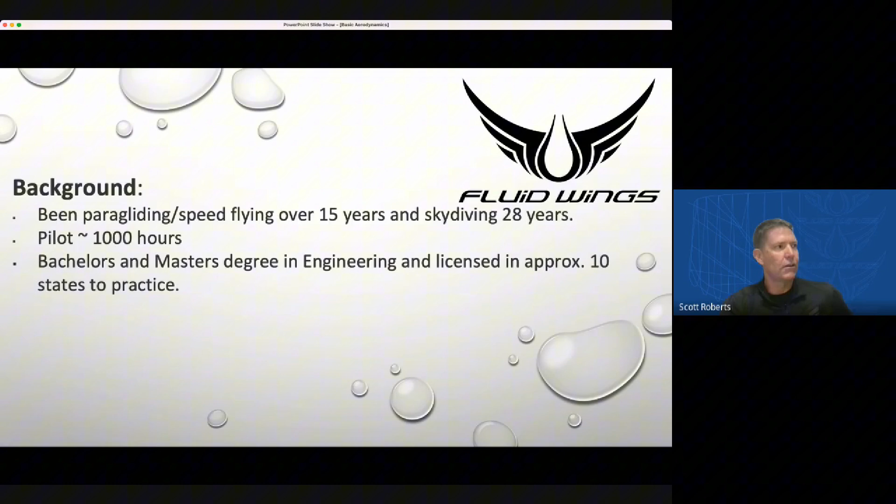A little bit about me. You guys don't, most of you know me, some may not. I've been paragliding and speed flying for about 15 years and skydiving for almost 28 now. Got a few hours flying airplanes, done some engineering. I've got a bachelor's and a master's degree. I'm licensed and I still practice in about 10 different states. I'm also lead designer here at Fluid Wings, so I design a lot of parachutes and some paraglider, speed wing stuff. Designed over 20 different models at this point.

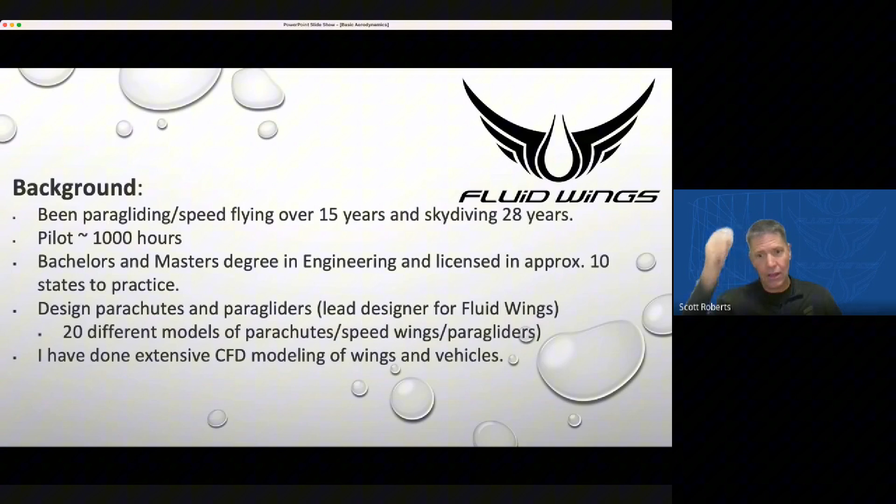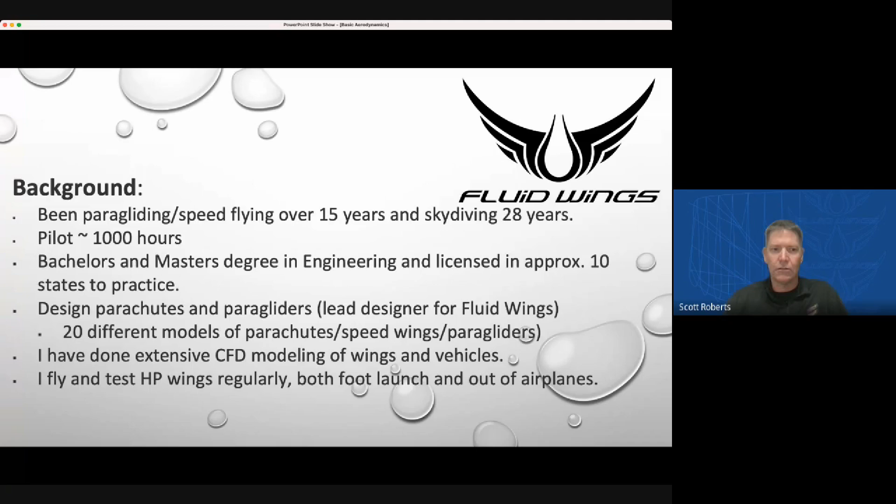Done a ton of CFD. CFD is computational fluid dynamics on wings and vehicles. Lots of stuff. So probably the most important part is that I still actually fly the stuff. Foot launch, jumping, probably more jumping these days than foot launching, but still active in both.

Tonight I kind of want to focus on low speed aerodynamics. Low speeds in an aerodynamics world is defined as nowhere near the speed of sound. So we're going to say really, really low Mach numbers. That pretty much applies for all general aviation, aircraft, gliders, paragliders, and parachutes. And probably will hold true for a really long time. I don't see us breaking Mach anytime soon.

I'll ask you tonight to pay attention and listen and understand that what I'm telling you may not be what you feel sometimes. That's totally normal. It happens in airplanes too. What you feel versus what's actually going on for aerodynamics are very often very different.

The aerodynamics is often very counterintuitive. So what people feel and what's actually happening with the airflow across the wing can be two different things. We're going to focus on what's actually going on with the wing tonight, and we can correlate that to what it feels like a little bit. But it's important to understand what's going on. In an aircraft, they talk about this a lot—flying seat of the pants versus instruments. Seat of the pants is literally when you're flying an airplane and you feel the feedback on the seat. Turns out that actually breaks down sometimes when you have a lack of visual references. The same thing can happen with airflow. So we're going to fly tonight using instruments and more technical jargon.

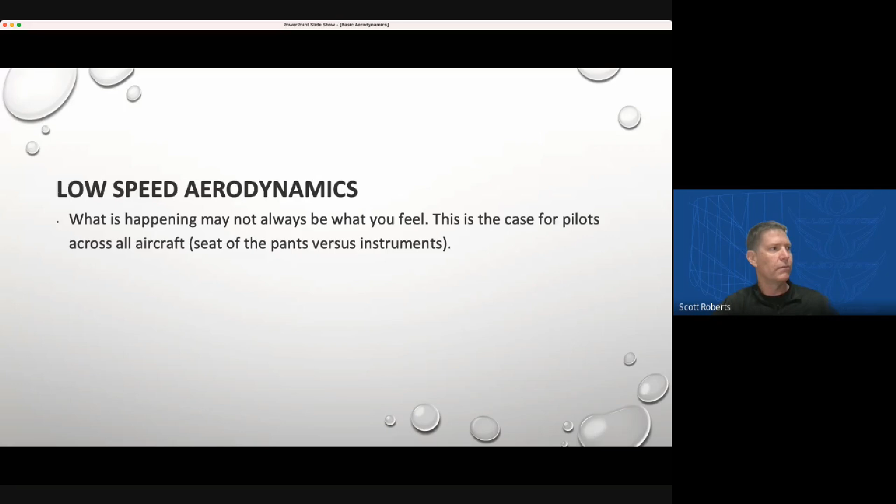For aerodynamics, the science is pretty well settled for low speed stuff. There's not a whole lot of new stuff coming. So be wary when you hear the idea that someone has a new theory in aerodynamics. We've really kind of solved a lot of this stuff. We haven't done a whole lot new in low speed stuff. Now, what we do is find new ways to capitalize on these existing understood mechanics and how it works. The future advances are all going to live there, in new ways of solving the same problems. But understanding how it works and what's really going on is kind of settled science.

Most of what we're going to talk about tonight is going to be steady state, not dynamics. We'll define steady state as—we're not going to be accelerating. So it's zero acceleration for a lot of the stuff we're talking about.

We're going to talk about a lot of vocabulary, how the airflow flows around a wing, and really delve into defining all the parameters for that. We're going to talk a little bit about how the airflow affects the wings flying through different columns of air, a little bit about glide ratios, angles of attack, stability, and then we'll wrap up with some basic turn mechanics. That'll be it, and it should take us about an hour plus tonight, plus some questions.

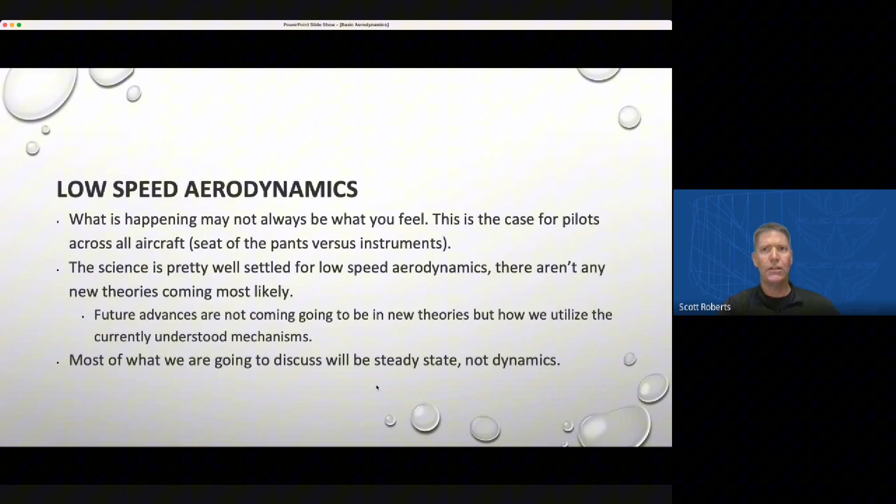So I'm going to jump right into it, and we're going to get going on some basic terminology. Everyone, you may know this stuff, you may not, but this is how we're going to refer to things for the rest of tonight. And if you use these terms as you're talking about flying in the future, you'll find that your conversations become a lot more clear.

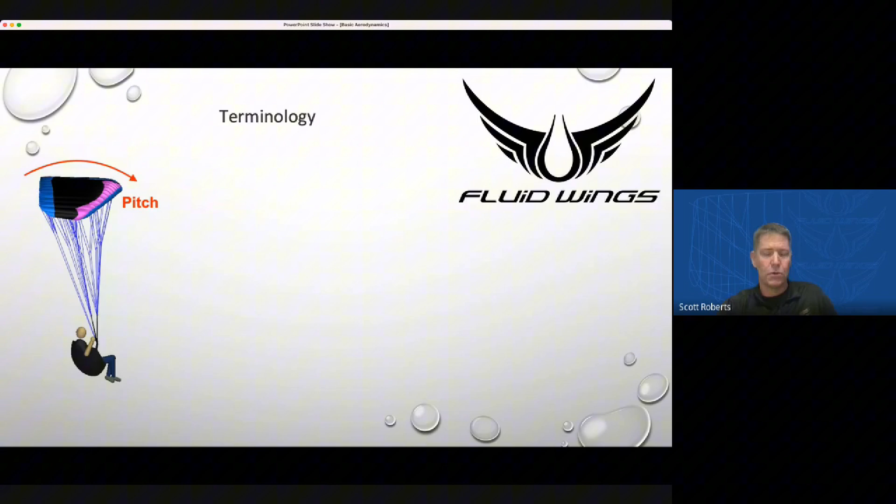So pitch is the movement around the axis. This controls whether we're going nose down or nose up. Roll is side to side. And yaw is swiveled side to side, changes the direction you're looking. On a parachute, these are all coupled together, so you can't really get one without the other.

They don't have a rudder. So if we had a rudder, we could get yaw individually, or we could get roll individually, or with an elevator, you could get pitch individually. But because we're a deformable wing with a pendulum weight under it, they're all coupled together. There's a few ways we can get these, but these are the basic axes of movement we're going to talk about.

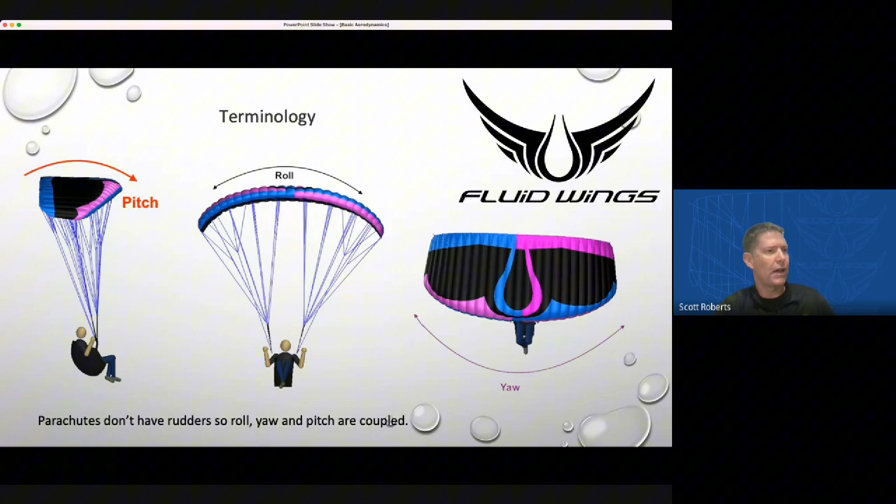Another thing we're going to talk about a lot, and you'll hear me mention in this and future seminars, is trim speed. When you set your wing up, it's set to fly at a certain angle of attack and a certain glide ratio when you go hands up and don't give any inputs. So it's kind of the natural flying attitude of the wing with your wing loading, your geometry, and your body. That's the trim speed.

So if you're on a speed wing or a paraglider, you could be putting speed bar in or using brakes. Speed bar would speed it up and decrease the angle of attack, or you could use brakes to change your glide ratio as well. But in this conversation tonight, trim speed is going to be just that steady state, no input flying.

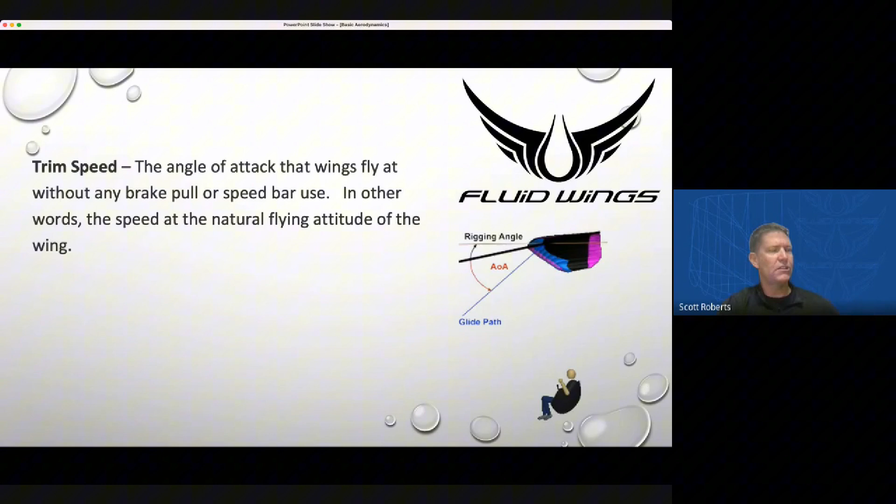Most higher aspect ratio wings, like paragliders, achieve their best lift to drag pretty close to their trim speed. So the flatter the wing, the higher the aspect ratio, generally they're going to be getting their best lift to drag, their best glide ratio, right at where they're trimmed, or pretty close.

For parachutes and speed wings, the two deviate quite a bit. Our trim speed is going to be nowhere near the best glide or best lift to drag on a parachute or speed wing. So that can be a useful topic and a useful way to understand your wings, when you're talking about whether a wing is fast, slow, or how it's trimmed. Talking about the trim speed can tell you a lot about a wing.

So I'd like to introduce that terminology. It's pretty widespread in the paragliding world. I don't hear it as much in skydiving, but I'm starting to hear it more.

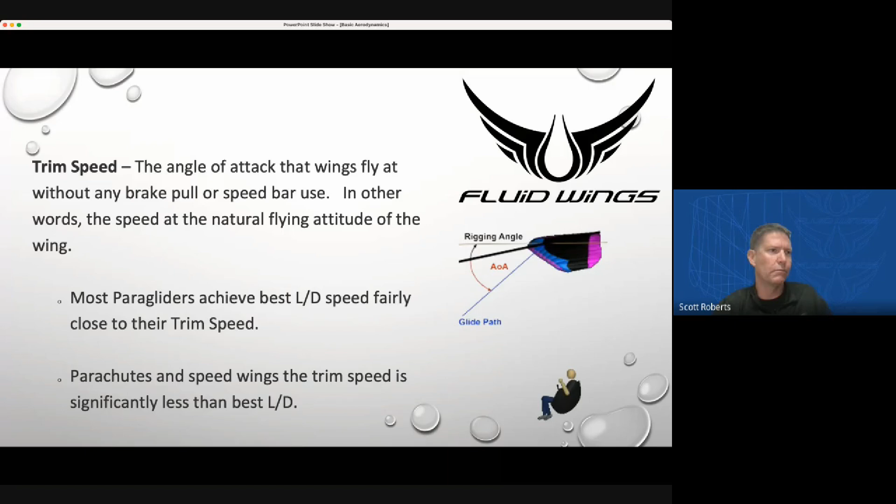Descent rate, pretty simple, this is just the vertical speed. So you're going down at a certain rate and going forward at a certain rate. In the US, we usually use feet per minute. In most other countries, they would use meters per second.

So descent rate, let me go back, is just a common thing. A lot of people get total speed and descent rate mixed up. They can perceive descent rate a lot better than they can total airspeed or trim speed, and they'll mix the two up. So I wanted to take a moment here to delineate these for people, so that they understand what you get on your FlySight is probably just descent rate. You're probably not getting a good trim speed because you don't have a venturi or a pitot tube.

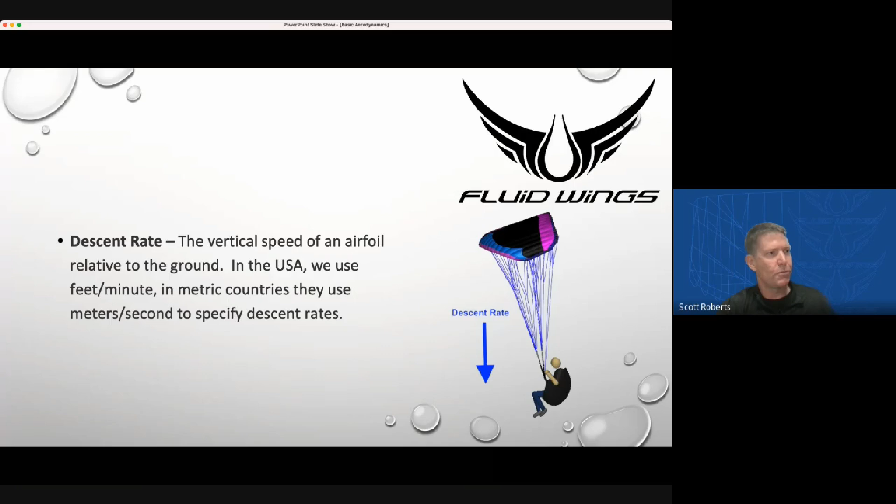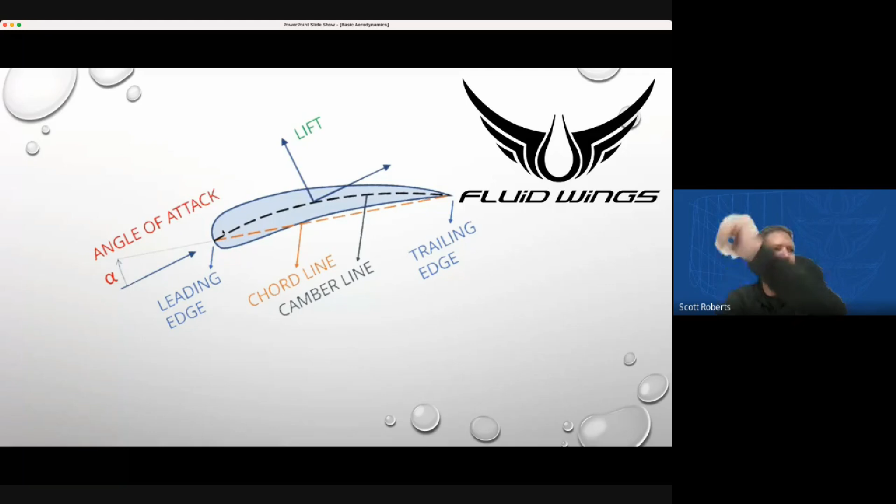Let's talk a little bit about the airflow across a wing. This is kind of the drawing you're going to see a lot of tonight. I just want to run through it in detail here and take a few seconds. You look right at the front of the wing, and right out here, that's the leading edge. A lot of people call it the nose, the beak, whatever you want to call it, but it is the leading edge. That's the proper term.

Then at the trailing edge, it's not the butt, it's not the tail, it's the trailing edge. If you draw a line between these two spots, you get the chord line. Chord line is something aerodynamicists talk a lot about, and people who build airplanes talk a lot about the chord line. It's from the leading edge, the furthest forward point, to the furthest rear point. A straight line between the two is the chord line. See, that's a straight line.

The dashed line above it is called the camber line, and the camber line describes the curvature of the wing. So the chord line and the camber line are not always the same thing. They're usually not the same thing. So it's important to realize the difference between the two.

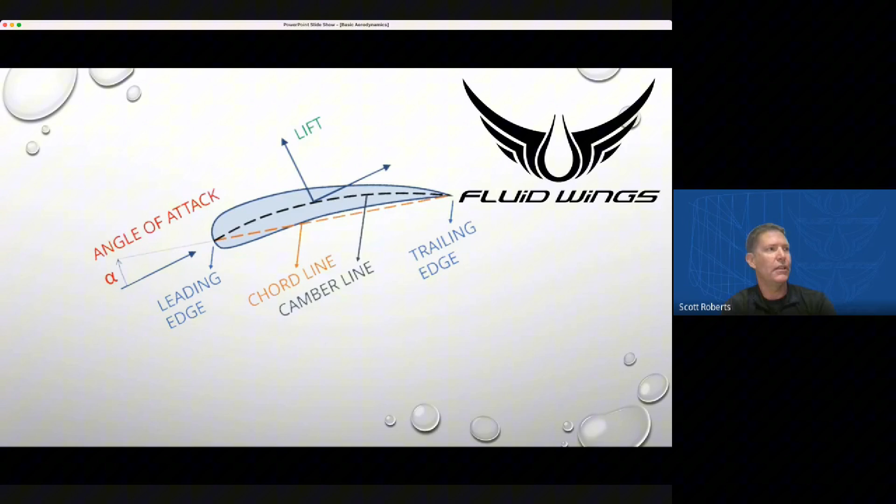And the angle between the chord line, which is a straight line, and the airflow on the wing is called alpha, or the angle of attack.

This is a really key point, guys, and I'm going to beat it into you tonight, for a few reasons. It's probably the most useful concept in all of aerodynamics. Understanding angle of attack and what happens with it is probably the single most useful concept, and it's probably the most misunderstood among pilots.

I hear angle of attack referred to as all kinds of different things. Typically, people associate their angle of attack with their glide ratio, and there's a big confusion there. Angle of attack doesn't care about what it's flying over the ground or the distance it's covering. It only knows the angular dimension between the chord line and the airflow.

It's that little squiggly sign, the Greek letter alpha, which aerodynamicists like to call it. You'll see it written as alpha, AOA, or angle of attack. Think about the relative wind as a skydiver feels it, or like sticking your hand out the window while driving down the road—you can vary the angle of attack on your hand by changing the angle you hold it at.

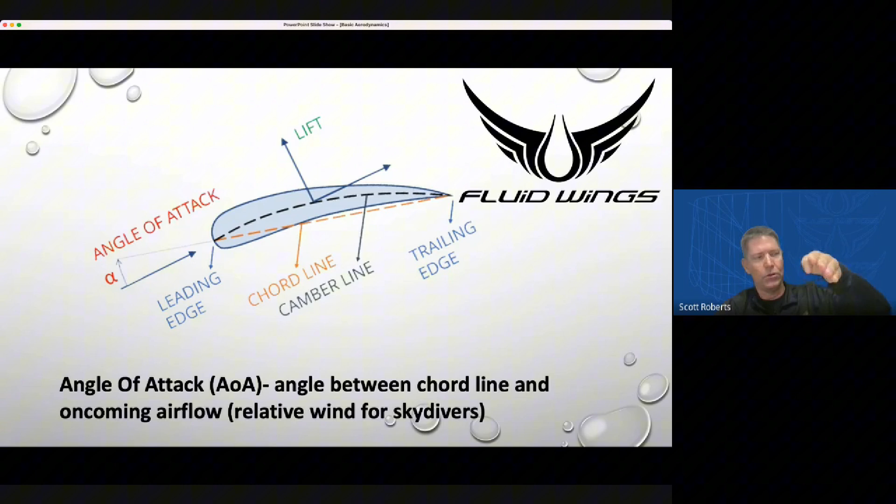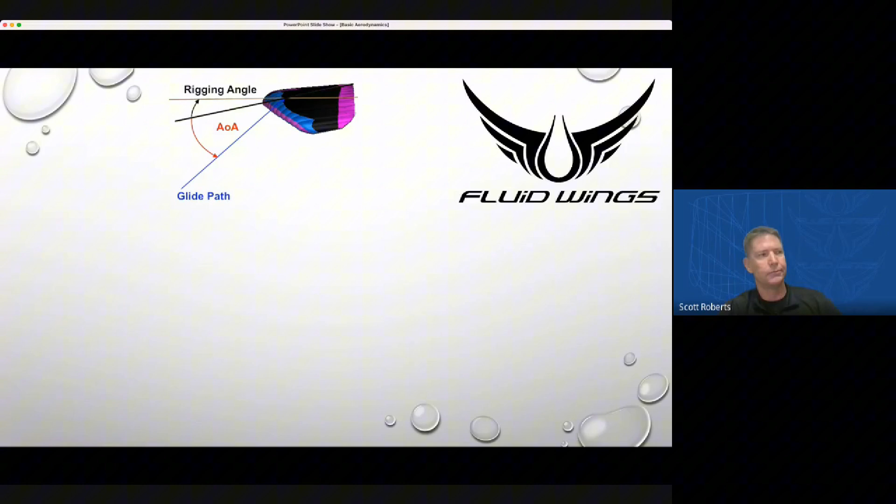So when we rig up a wing, you've got the rigging angle and the angle of attack. They're both contained between horizontal and the glide path, as you can see at the top here. Again, this is the angle at which the airfoil's chord line meets the relative airflow—alpha.

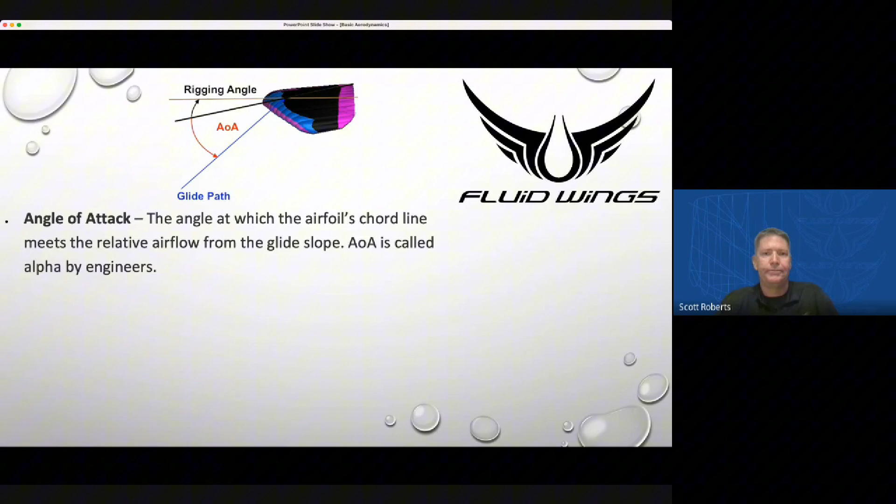Let's talk a little bit about best glide—best L over D, or glide ratio. The best glide is the glide ratio where the wing flies the furthest relative to the air, not relative to the ground. In completely still air, that will be the same as relative to the ground, but in a moving air mass, the two won't correlate. Your wing only cares about the air when it's flying—it doesn't care about the ground, and doesn't see it. Only you do.

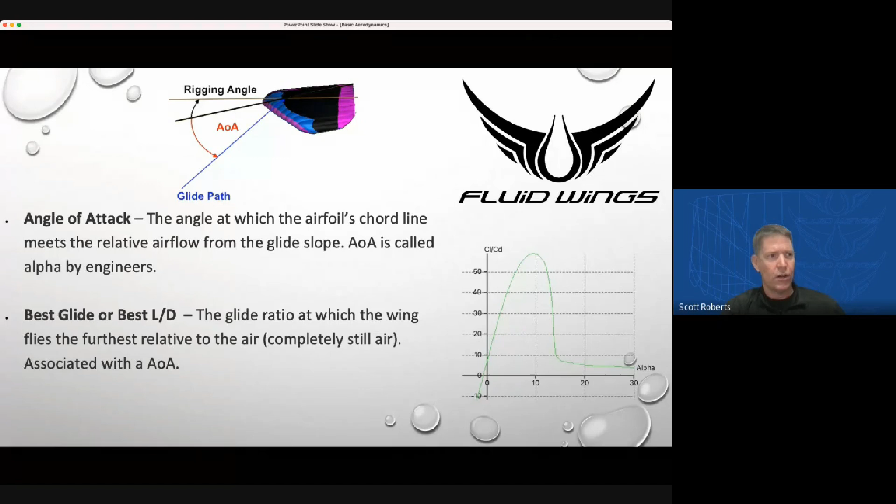What's important to realize is that the angle of attack the wing is flying at determines the glide ratio in large part, and there's an optimal spot. At the top of the curve, where you get the best coefficient of lift over coefficient of drag—which, spoiler, is your glide ratio, I'll explain in a couple slides—that gives you your most efficient gliding response, and it varies with angle of attack. That's just one of the many things angle of attack affects in how your wing operates.

Let's talk about how the equations and the math work a bit. In flight, you've really only got three forces acting on you. We gather up all the lift and put it into one arrow, weighted by how much pressure is in different spots—you integrate all that and get a resulting lift vector acting at a certain point.

You can do the same with drag—some acts on the parachute, some on the lines, some on the pilot, acting a little further down, and we resolve it all into one force called drag. Then there's weight. Those are the three basic forces acting on you in flight. If we had a motor, we'd have to add thrust.

So how do we determine the lift? Let's look at what lift actually is. In aerodynamics, we simplify the lift equation to coefficient of lift times one-half rho v-squared times s. Rho, the Greek letter, is air density. V is the velocity, and s is the area of the wing. Aerodynamicists use s for wing area so it doesn't get confused with other areas used for, say, drag calculations.

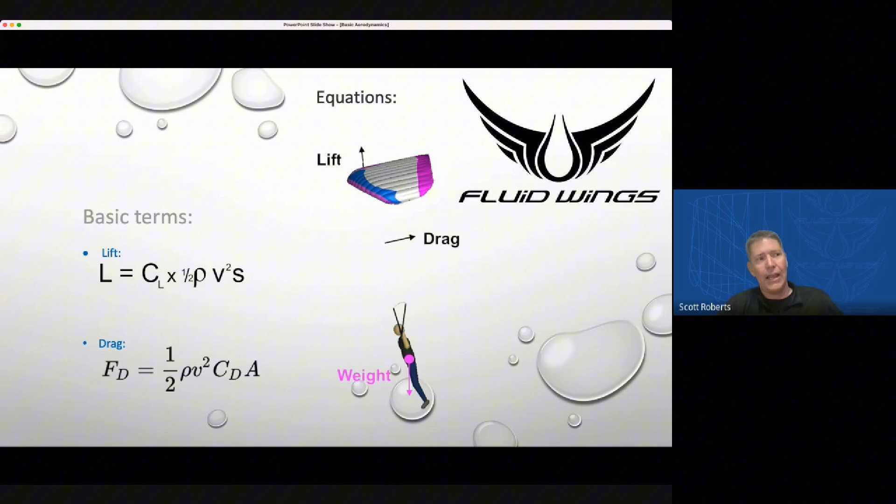The drag force is one-half rho v-squared times coefficient of drag times a, where a is just the area that drag acts on. Drag acts on the lifting surfaces, the pilot, and the lines, so you get a bigger a than the s area. The important thing to realize is that everything is a linear relationship except for one value—velocity. Drag goes up as the square of velocity, and so does lift. It's an exponent, so it matters far more than anything else in these calculations.

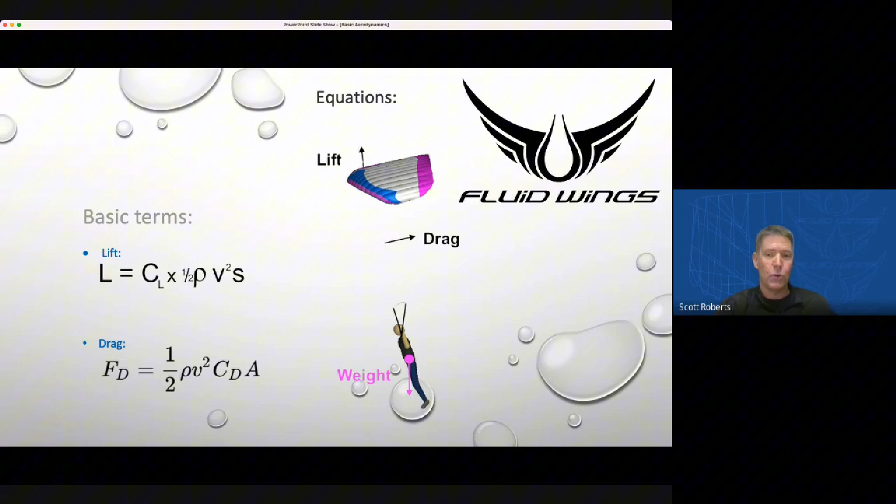So we've got three forces, as we said. A lot of people struggle with this too. In static flight—meaning steady state, with no acceleration or changes in velocity—you're not accelerating in either direction. And if you're not accelerating, your lift must equal your weight.

Let that sink in for a second. Lift is weight in static flight. Okay.

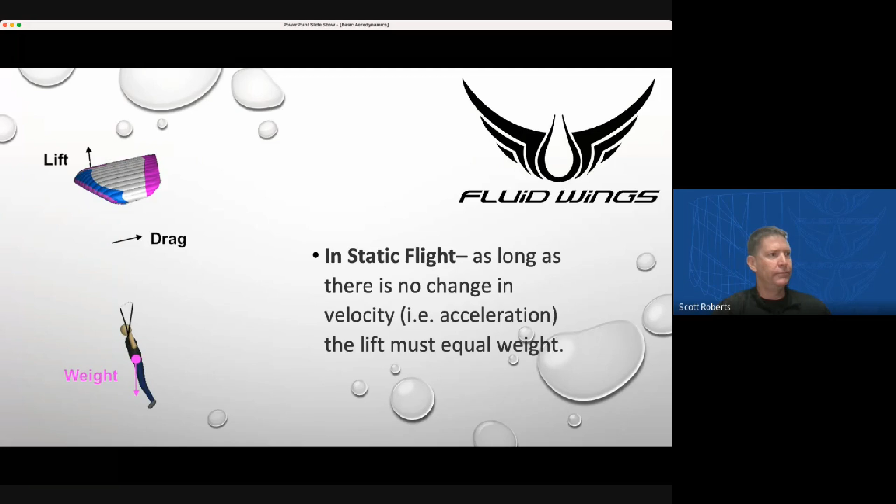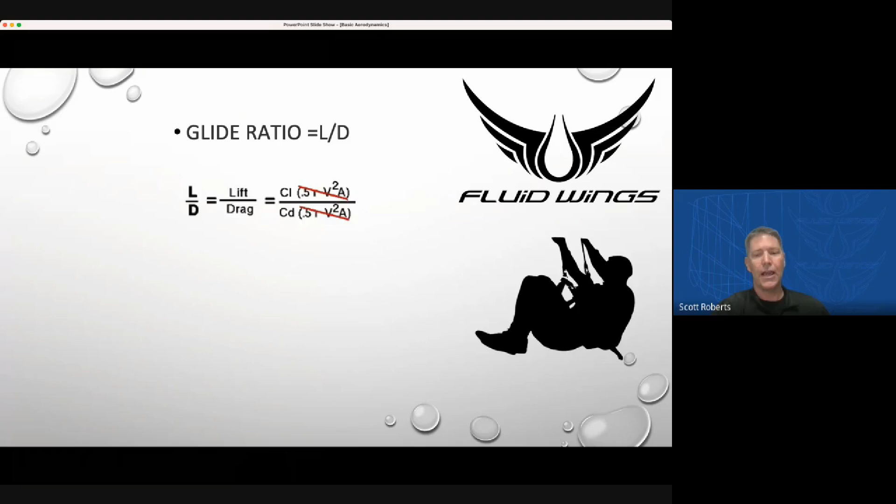So now let's take these same equations and look at our lift to drag. Glide ratio is lift over drag. Remember, we're only dealing with a couple forces, right? We've got three forces, I resolve them. My glide ratio, the distance I'm going to cover over the ground, is my lift divided by my drag. Because we have common factors there of 0.5, or one half rho v squared times a, you can cancel both of those out, and you get your lift over drag is your coefficient of lift over the coefficient of drag.

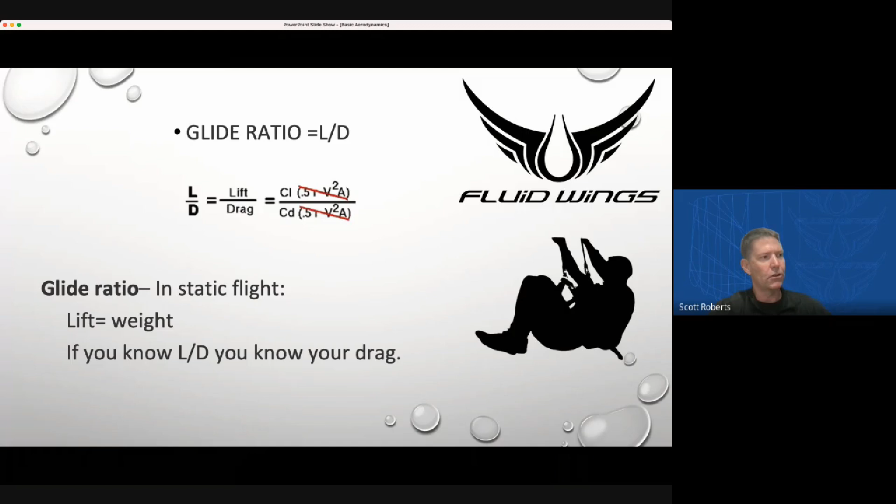So in static flight, if you know your glide ratio, you know how much you weigh, you know your drag. It's kind of neat. For example, someone who's flying at a glide ratio of 2.0 and is 200 pounds, we know that their drag is 100 pounds. So kind of cool. It's a really handy direct relationship, something you can experience that is actually the aerodynamics when you're out flying. And I love it because it's one of the few things that's not always apparent to people right up front. This is a really powerful tool when you learn it and understand it.

So let's talk about what happens when things change in the air mass. You've got a thermal. We're not always flying through calm, steady state air. So let's look at a thermal. What does a thermal look like? This diagram of a thermal is out of the FAA glider handbook.

It is really accurate. In the center of a thermal, you have lifting air. It hits a certain point where it stops, slows down, crowns off the top, and in between there's really spinning rotors and then descending air on the outside of it. Then on each side of it down at ground level, you're going to see suction causing horizontal flow, and that horizontal flow fills in the cavitation from the lifting air. The important thing for us to realize is that whenever we see lift, there's usually some sort of sink nearby. They kind of come in a pair, right?

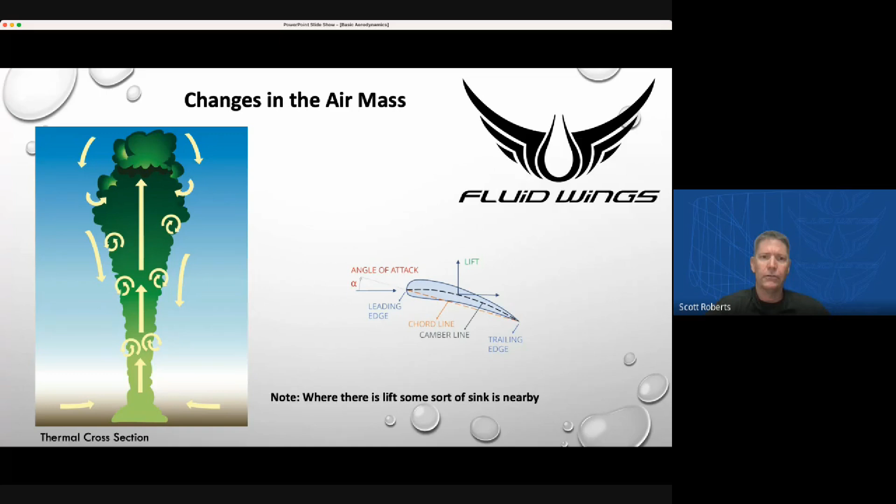The important thing here is to remember, again, wherever there's lift, there's sink. And when it's mechanical lift, it's usually going to be a lot of turbulence, like rotor. Rotor is bad, okay? A lot of reasons.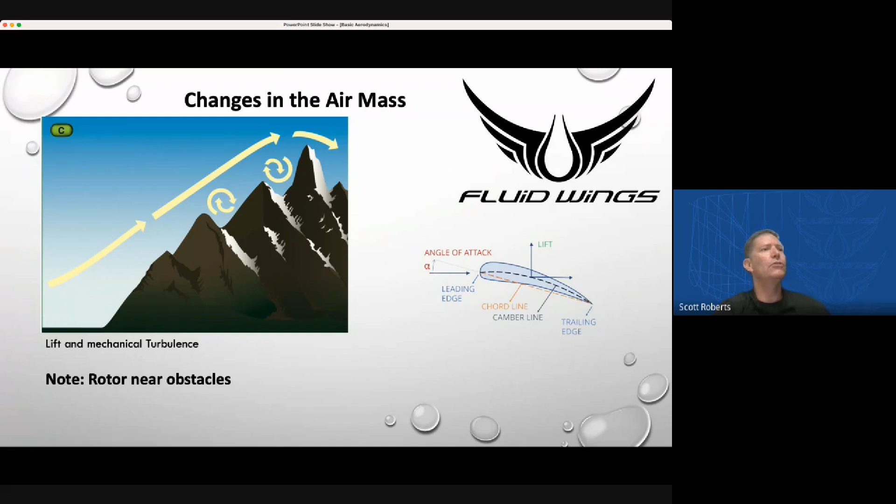So let's talk about what lift does to how the wing is hitting your airfoil. So we got sinking air. It's going to decrease our angle of attack. Now the effect is only for a short period of time, and your wing's going to change pitch to reach equilibrium. But instantaneously, when you're going from steady state air into sinking air, you have to add up these vectors. So you've got your normal airflow, flowing at the angle of attack, that alpha that we've trimmed our wing at, and it was flying along in steady state, right? Well, you add in that red sinking air on top, and you resolve those two vectors into a new one, and you can see that it decreases that angle of attack.

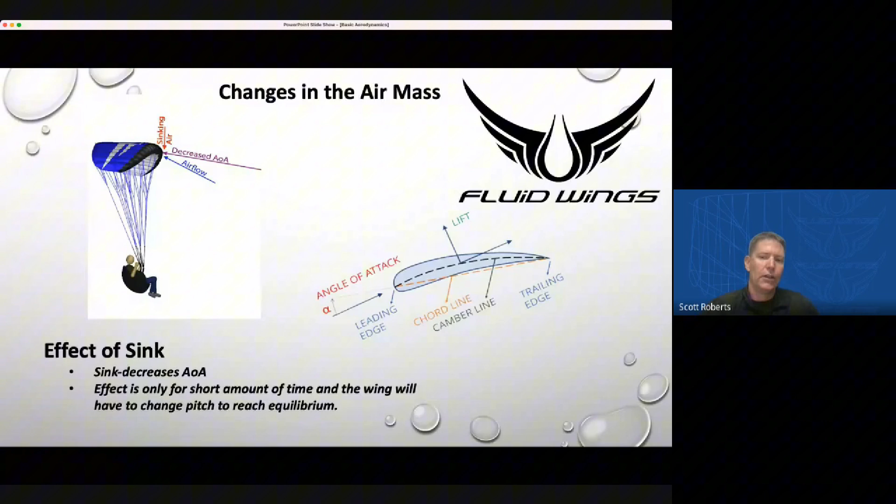So you'll have a decreased angle of attack when you enter sink. Usually when you enter sink, you're also going to feel a pitch change. You're going to feel the wing surge forward to increase its glide speed, because now it's got to accelerate a little bit to make lift equal the weight. Conversely, when you enter lift, it increases the angle of attack.

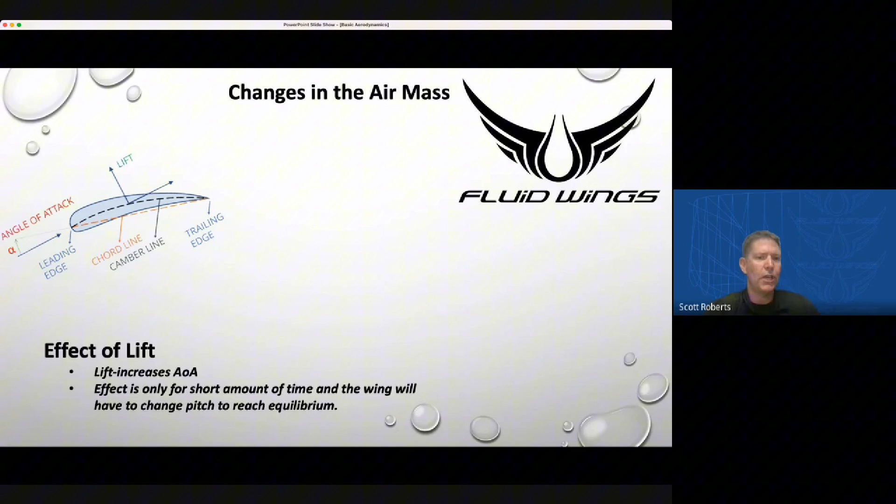Again, the effect is only for a short time. The wing will have to change its pitch and reach a new equilibrium. But when you've got the airflow there, your airflow is in blue, and the lifting vector is now going up, the red's going up. They both resolve into an increased angle of attack, and you can see that it's a higher angle compared to the chord line of that wing.

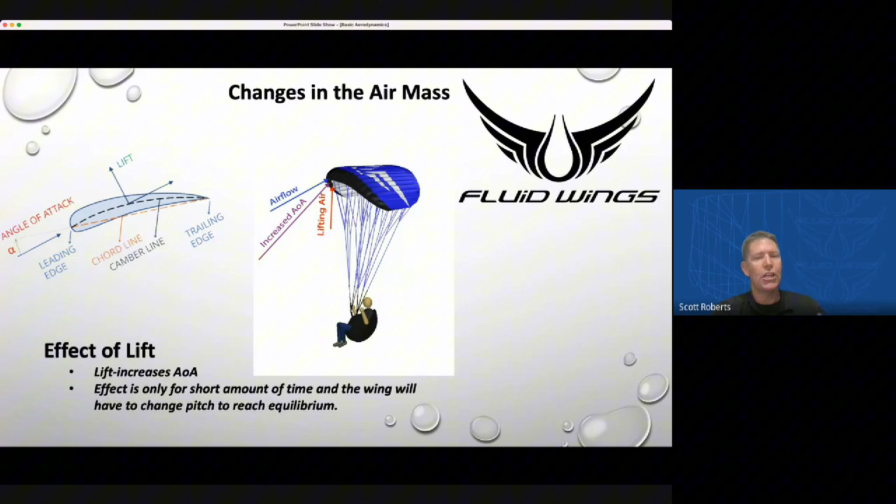Well, why is that important? We're going to cover that in a little bit, but it is important to realize that when you change air masses, when you change air densities, when you change airflow, whether it's going up or down, you're going to change the angle of attack on your wing. So let's talk about what happens on angle of attack versus the wing and its airflow.

Here's a typical coefficient of lift versus alpha graph. If you look on the left is the coefficient of lift. And again, we know that coefficient of lift really defines a lot of the lift if I know my velocity and my areas. So typically when we're designing, we're using just a coefficient, and we're changing the properties that change the coefficient typically.

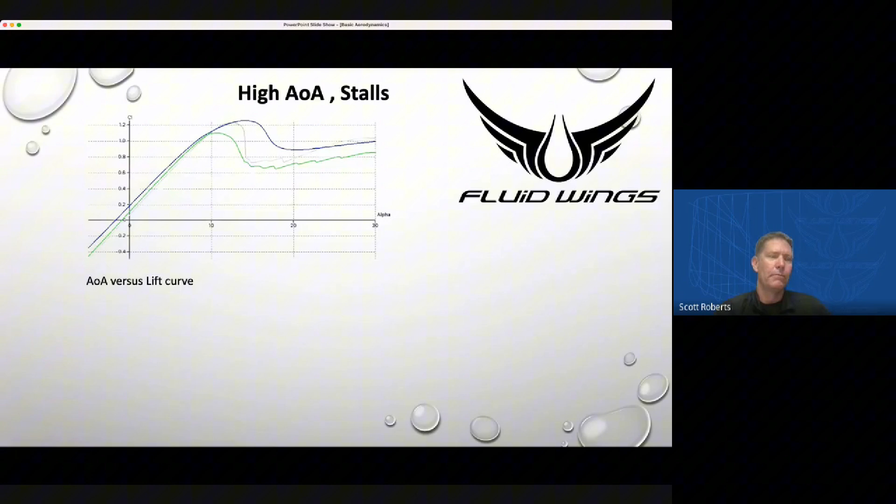The important thing to see here is at the bottom, really low angles of attack, you get a low coefficient of lift. It continues to climb until you get really high. And then what happens there? Well, we get what's called a stall.

So an aerodynamic stall is when the wing decreases lift suddenly. It's not losing lift completely, the lift didn't completely go away. It just decreases. So if lift decreases, then you have an imbalance of forces, and the wing has to accelerate one direction to recover from that.

But it is neat to see that out there at the very edge, that wing is still producing lift. I'll throw in there, like you think of an F-22, they've got the vectored thrust, and you can see it when they're flying sometimes. They can fly at crazy high angles of attack. And that happens if you have enough thrust and you can push it in the right direction and keep everything stable, there is lift out on the edges of these curves. It's just not as useful, right?

So high angle of attack, you start getting stalls. Well, let's talk about what happens at a stall. And it's important to realize that stall is set at an angle. It's at a critical angle of attack, and it's not related to an airspeed. It's generally an angle of attack, okay?

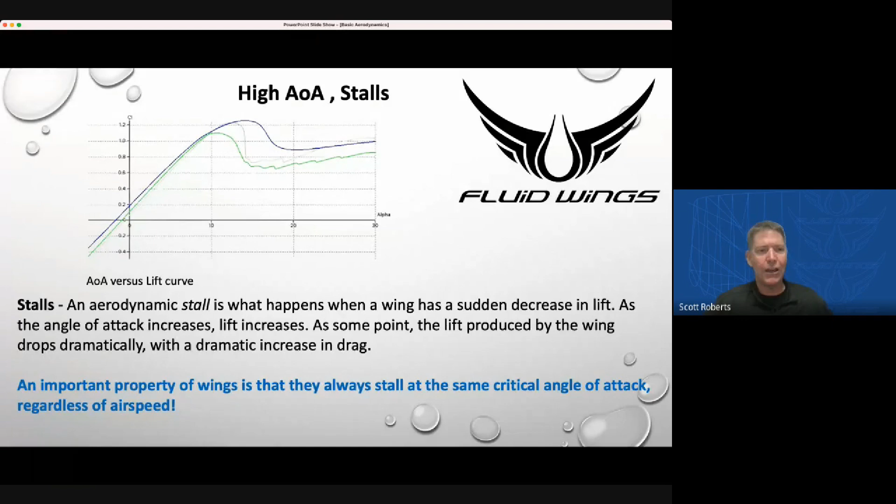So speed is not going to give you extra margin on this. And the way to think about this for what it relates to us using every day is you're flying on rears and trying to dig out of a turn or something. Once you hit your critical angle, doesn't matter how fast you're going, you're not going to get any more out of it. Okay.

So at low angles of attack, let's talk about that too, because that's an equally important envelope on the flight parameters we're going to get. We operate kind of weird aircraft. A lot of other wings, if you've got a fixed wing aircraft or a glider, say a sailplane glider, they can experience negative lift and they still maintain their shape.

They still keep flying. In fact, some sailplanes will go on their best L over D in still air, or when they're on speed, trying to get their best penetration to get to the next thermal. They'll actually be at negative lift out on their wingtips, and you can actually see the wings curve downwards because they're producing negative lift at the wingtips, and then most of the lift is coming closer to the root.

That is something we can't do on our wings because we have lines, and lines only take tension. They do not do very well transmitting compression. So once you get negative lift on a line, it just folds up and the wing comes down. That typically happens down in that little red box.

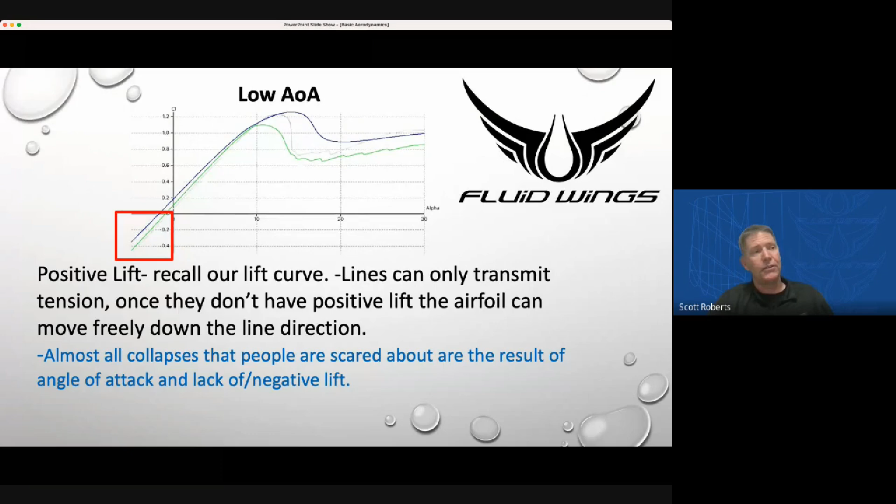So the things that we're scared of, paragliders, speed wingers, parachutists, we're all scared of the collapses and the stuff that comes from an angle of attack or lack of lift out there, negative lift. So this kind of leads us into talking about stability. So I'm going to tell you about stability. This is what aerodynamics people refer to as stability.

And then what we refer to as stability as ram air pilots, speed wings, paragliders, and parachutes, they're entirely different. But it's important to understand what an aerodynamicist thinks of stability. So static stability is really the tendency of a wing, when you give an input, to return to its original attitude. If you were to take a wing and turn it and it recovered quickly back to level flight and righted itself, it's got positive static stability.

If it doesn't go back to level flight or the original flight attitude and just continues along that path, that has neutral stability, and there really aren't any that we would fly. But if it has negative stability, it's going to move further away from the original attitude and diverge and become wildly unfun to fly, probably, for a parachute or a speed wing. But that's static stability. That's what an aerodynamicist is usually talking about.

For dynamic stability, they're talking about the number of cycles it takes for it to come back to the steady state, or to where it was pre-disturbance. Something that you don't want to see is a divergent tendency, where the oscillations get bigger. That's negative dynamic stability. If the oscillations become lower, which is what you do want to see, that's damping. It's said to have positive dynamic stability. You notice none of this has the word collapse in it at all.

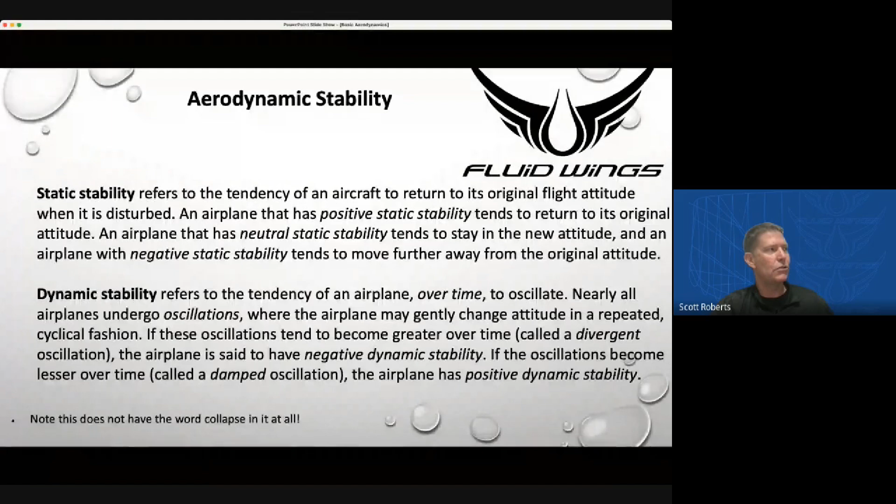So when we talk about stability internally, we have to realize that people outside of our microcultures don't understand what you mean. To an aerodynamicist, it means something completely different. We're going to define some ideas here and maybe use some slightly different terms. Parachute stability is often confused with collapse or deflation and recovery. In the paragliding world, they usually call them collapses or deflations. They typically don't call it unstable. But skydiving wings and paragliders have different levels of passive stability.

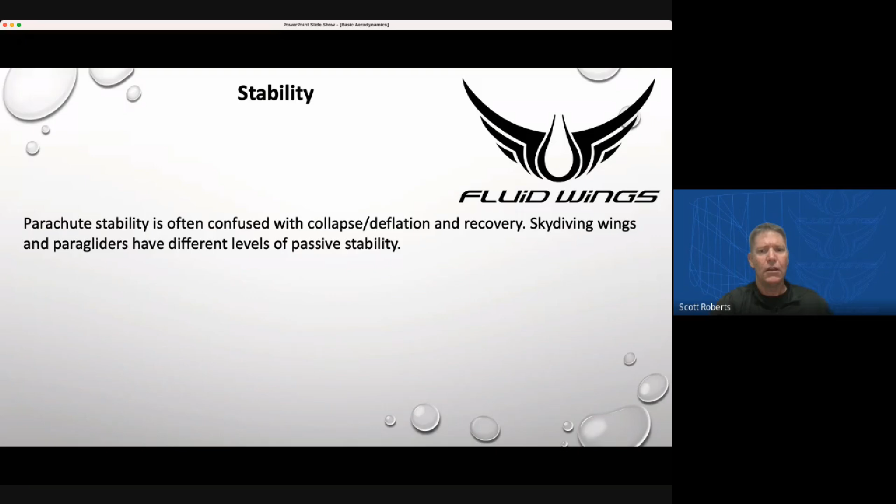Now, passive stability we're going to define tonight as the inherent ability of the wing to resist these pitch changes or pitch divergences or collapses without requiring a control input from the pilot. So something with high passive stability would be something where you hit some turbulence, some funky air, and you don't have to do anything. The wing will right itself, and it's probably not going to take a big collapse or any at all.

And something with low passive stability is going to be something where the second you hit that sinking air, if you don't give a brake or riser input, you're going to get something you maybe don't want. So passive stability is the ability of the pilot to not do anything. In skydiving, passive stability is very high, much less so in speed wings, and in paragliding it's even less so.

And that is where we're going to tie back in. A lot of that is tied to angle of attack. So we don't use it the same, but almost all of the stuff we call instability is tied to angle of attack and pitch movement and inflation of the wing. They're all tied together a little bit. But if you get one thing out of this, understand that angle of attack is the key principle to understanding all of this.

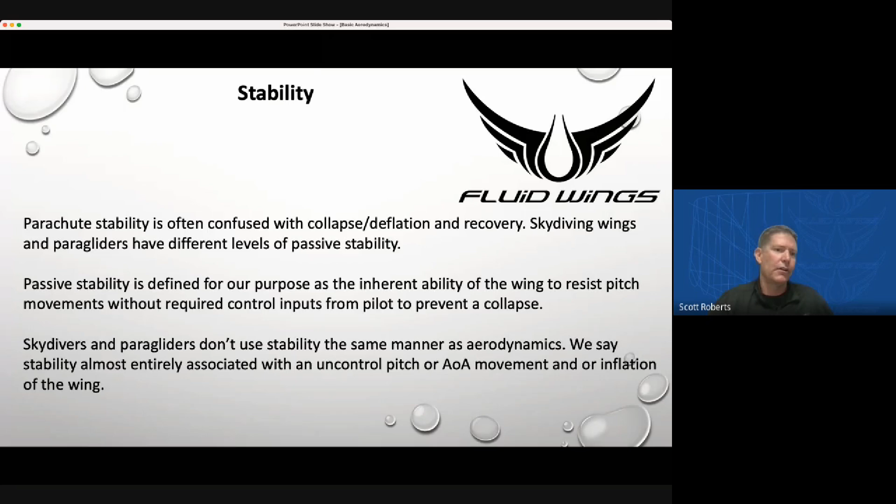So let's talk a little bit about pressurization and how ram air wings are pressurized. Because I hear people talk a lot about pressurization, and it is somewhat misunderstood in a lot of ways. So we basically use stagnation pressure, or ram air, and that's the force or the pressure of the air that's moving or that you're moving relative to as it stagnates against a surface. So for us, it's the pressure when the fluid comes to rest.

So you can either imagine the wing moving through the air, and it takes that air and goes from at rest to moving it to the same speed as the wing. Or if you just accelerate the air at the wing and the wing is stationary, when it hits right here, you get that little spot where the air stops, and that's stagnation pressure, right? And that's the only tool we really have to control our pressurization on the wings.

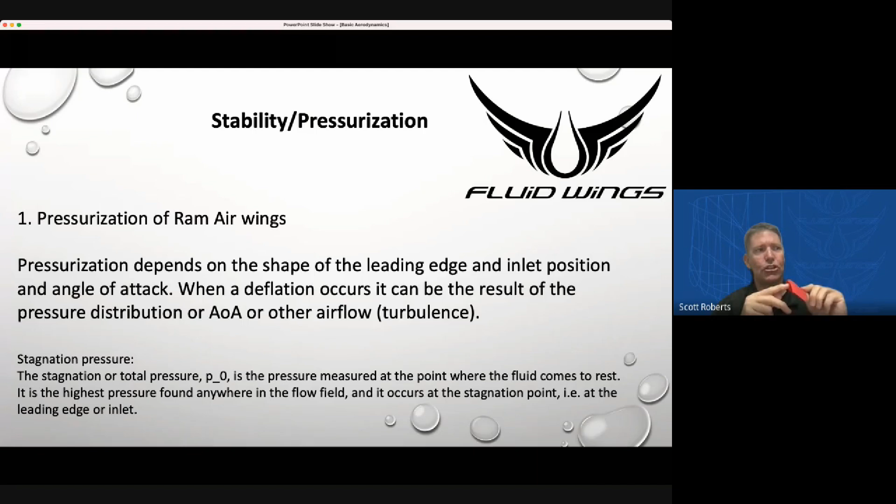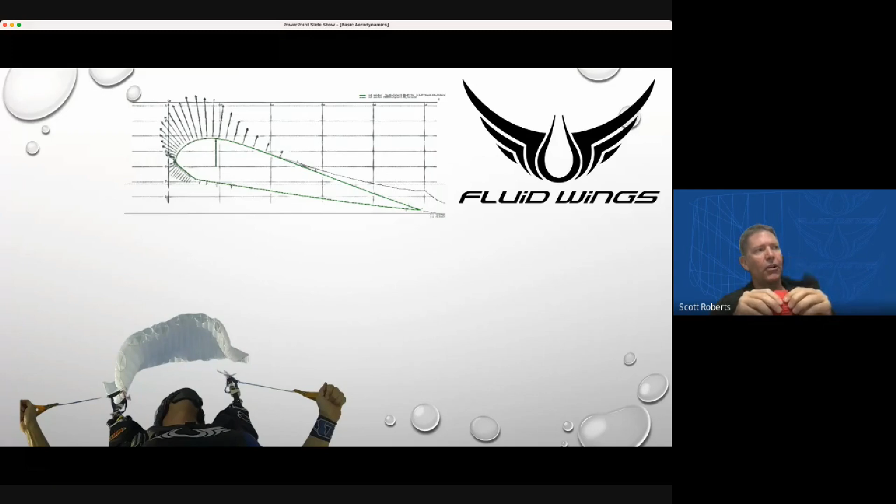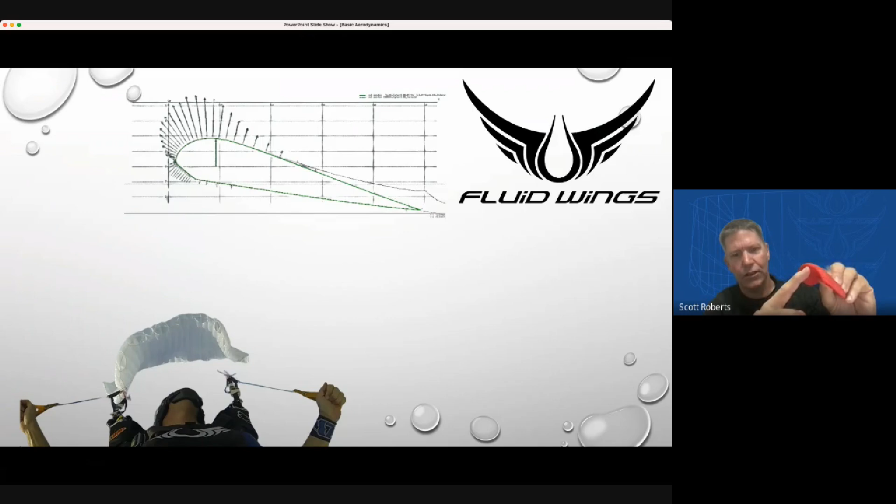So if you look at it, this is the diagram of a wing. This is the pressure distribution. So if you look, you've got negative pressure acting away from the surface up at the front right there. It's a lot of lift. That's good. It resolves down into that big arrow, which is the lift vector. Then as you go towards the front in that straight section, that is right here, and that's your leading edge, and that's your stagnation pressure.

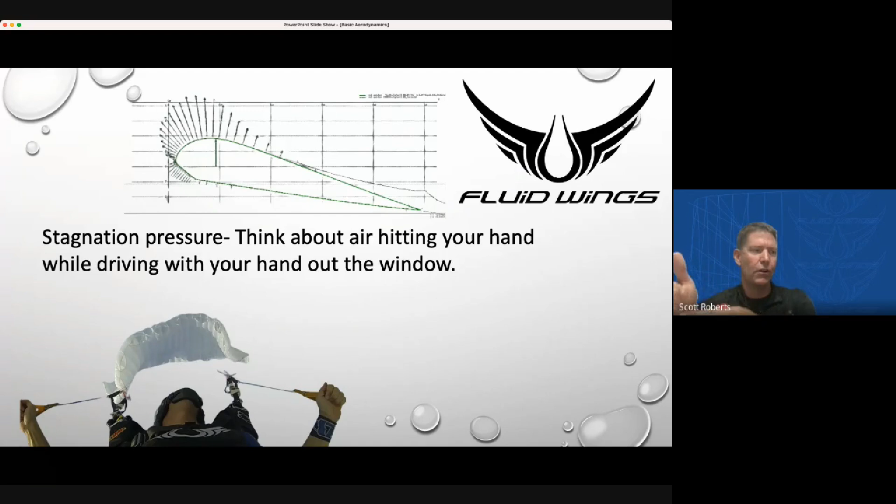So think about stagnation pressure as you're driving down the road and you stick your hand out the window and you're holding it flat. The pressure right there on the hand, that is your stagnation pressure, right? Basically, when we're designing internal pressurization on a wing, or you're trying to keep the wing flying and keeping its shape, you've only got stagnation pressure to work with. You're not going to get any more. Hopefully you don't get less.

So that's a key pressure there to understand, is that you can never get internal pressure on a wing more than the stagnation pressure. High speed, high pressure; low speed, low pressure. Let's look at pressurization on a wing. So you see the graphic there of the wing over here, and you can see this is one that I was flying. I'm going to show you the video of that right next.

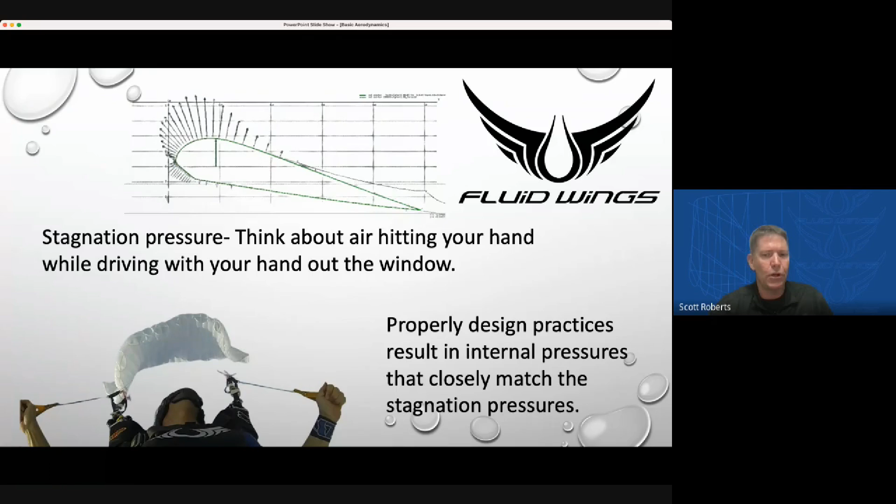The one thing I want you to see here is as you look at it, notice that that wing is not really flying very good. It's not keeping its shape, but it's actually really well pressurized. Collapses very rarely have anything to do with pressurization. They're almost always an angle of attack phenomenon. And I'm going to show you one here so you understand what you're going through here.

Make sure I got the sound off on this, because the air sound gets loud.

So this is an early HK prototype, and one of the trade-offs when you design a wing is that you're always balancing performance, stability, and a bunch of other factors. And early on in the HK project, we had some real performers, some stuff that we really liked. It had a much lower passive stability, and as part of that, we decided we had to learn where the boundary conditions were on this. Where did it quit working like we wanted it to?

And so one of the things we kept doing is we kept doing line sets, and we'd change the angle of attack. Another line set, change the angle of attack, until we got to this. And believe it or not, we actually wanted this. Looking back, it wasn't very much fun, but I want you to pay attention as we're watching here. It's a little jumpy, but pay attention to what inputs make things better and what inputs make things worse.

And then let's talk. Oh, look at that. So the brakes got a little tuck. Oh, wow, rear risers, that looks really good. Nice and clean. Nice and clean. All right. Okay, I'm gonna go brakes here. Oh, whoa, whoa. Get squirrely. Back on rears. We're in good shape.

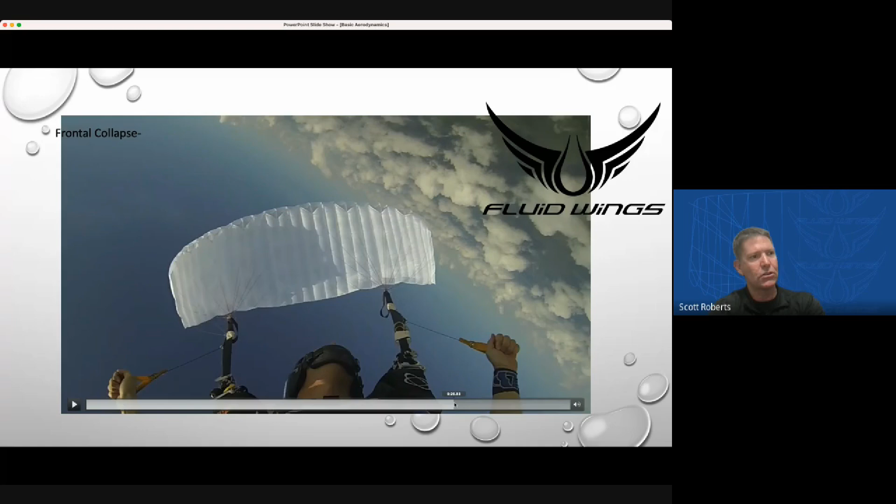I'm going to zoom through here to a couple key spots. See here, I went from rears to brakes here, and it's pretty good. And when I allow it to get some pitch changes, that's where things get funky. That spot right there, you would think that I'm adding angle of attack, right? I'm giving brakes, slow it down, they pull it back behind me. Not actually always the case.

Depends on the airfoil a little bit, but in general, they don't add stability as quickly in the early phases as other methods. So, oops, here, hold on. So when we get it here to rear riser input, boom, that fixes it right away, right? So that's a little video. I'm going to talk about that a little bit now.

So we're going to go into the next page here, and I want to show you a little bit about why this is true. So when you give an input on controls or your brakes, you add angle of attack, but you also change the shape of the airfoil and you add camber. So this does a couple things.

It takes the lift vector and moves it back. Remember that lift vector, that big arrow coming out of the middle of the airfoil there, is the resolved pressure for all of the wing. And it takes it and moves it backwards. Well, when you've got the wing back here and you lift from the rear, it makes it nose over. It puts it to a low angle of attack when it noses over, right?

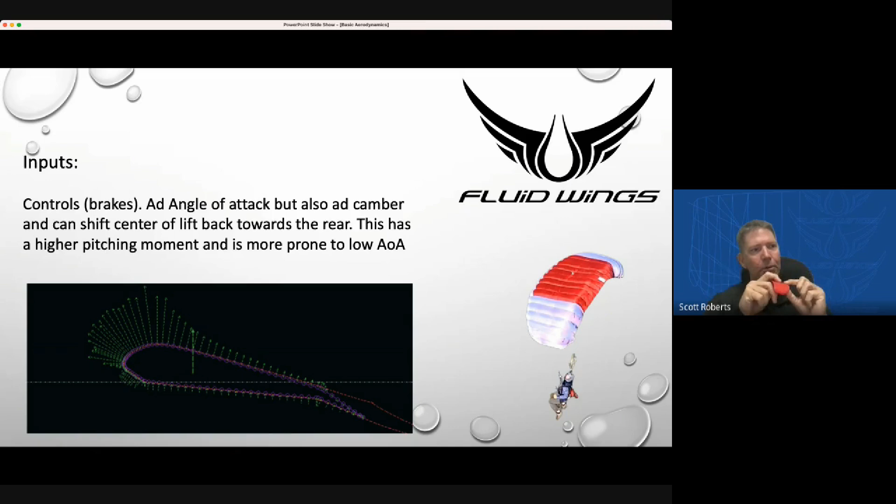But in ram air wings, and in particular really steep ram air wings, you don't just get a hinge. It's not that simple. Because you're pulling forward, you'll get a little buckle, and that little bump can be exacerbated. If you look at that little photo on the right, that's us tufting one of our prototypes and seeing the airflow when we were looking at some of these bumps and doing some R&D a couple of years ago. You can see that it accelerates around that back area, and almost all parachutes do this, and speed wings to some degree, particularly the steeper ones.

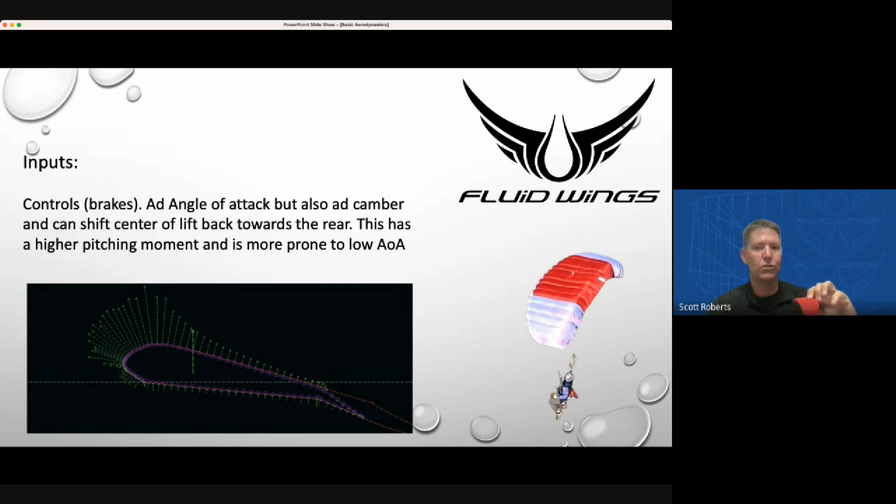This is more pronounced, but this actually exacerbates the effect we're seeing and creates even more of a pitching moment. So brakes actually can increase angle of attack, but at the same time they can change the pitching moment, and maybe it's not always better. Not in all cases is it worse, but by and large, a rule of thumb is that it's not going to be all good. You're going to lose a little bit of stability and pitching moment when you add controls.

Let's look at just adding angle of attack directly. The closest thing we can do to that on our parachutes is pulling on our rear risers. Speed wings have some more efficient systems for that, even more directly angle of attack. If you look at the top picture, that is an airfoil at basically zero angle of attack. You can see there's some lift on the top, some negative lift on the bottom, stagnation right at the leading edge, and the lift is very small, at maybe 25, 27% of the chord.

When you add rear riser, it moves forward, and all of the downward pressures tend to decrease and the upward pressures increase. So when you add angle of attack directly, you get the increased AOA without shifting the lift vector backwards or adding camber. So your pitching moment, the thing that makes the wing want to swing forward or back, stays the same. If anything, it helps keep that pitching moment upwards. And an upwards pitching moment is directly related to the passive stability we talked about earlier.

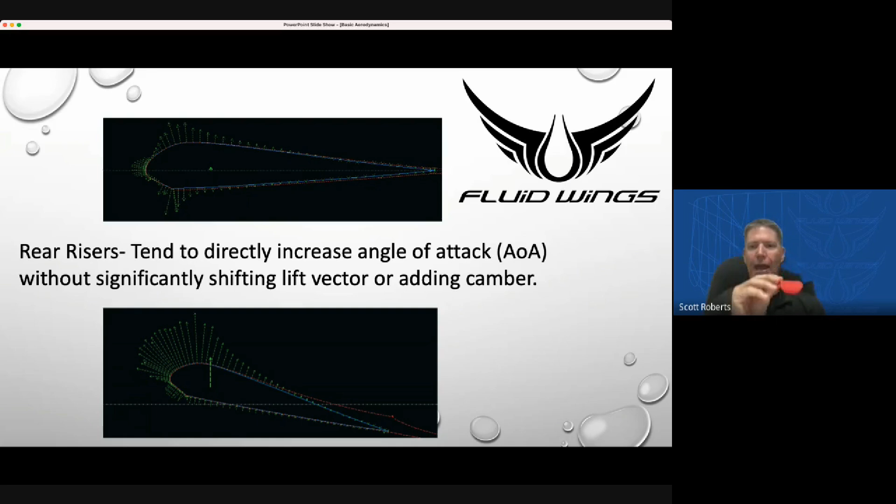So the lesson here is that with a lot of inputs, the controls can add angle of attack, but at the same time they can reduce some of your stability and change the location of your lift vector. Whereas rear risers can add angle of attack without moving the center of lift, or if they do, they generally move it forward to a more stable position. So what does this do for us in real life? We're trying to understand how to control the angle of attack on our wings in less than optimal conditions like turbulence.

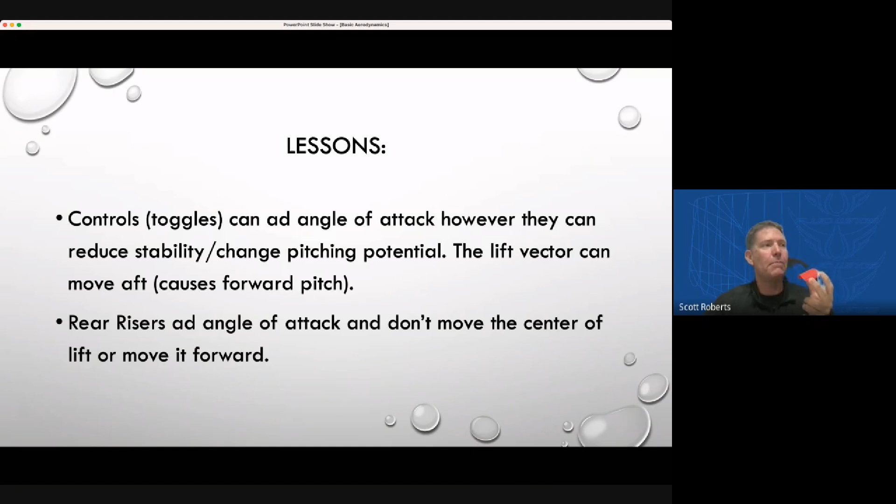And the lesson is that small brake inputs are not the best method for turbulent flight. Anytime you need to make sure you have a positive or high angle of attack, your rear risers or riser inputs may be a better input, because they directly affect angle of attack without adding any camber or changing the center of lift. Okay? That's our takeaway from the angle of attack talk.

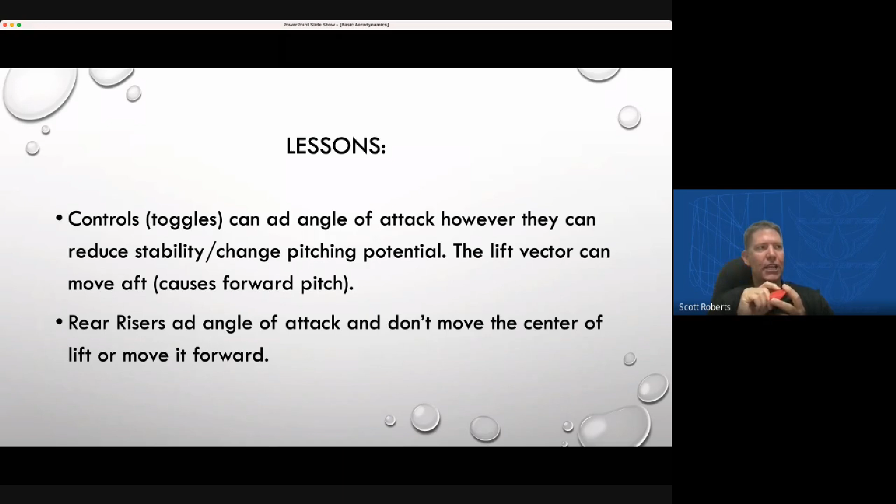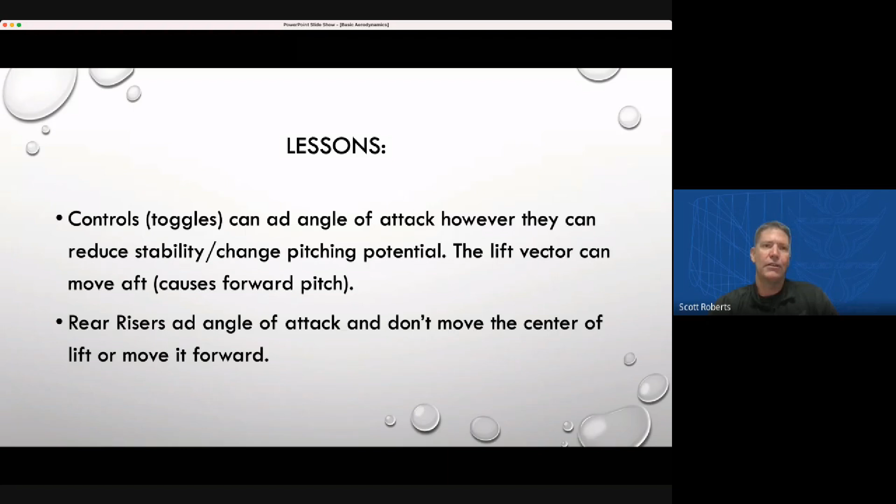Now, I do want to talk a little bit about angle of attack when wings are flying, because you don't just do steady state flight, right? When we're flying around, we're actually varying the angle of attack on certain parts of our wings in flight sometimes. This is going to be the last thing I try and shove in your brain, but it's complicated, so bear with me, okay?

So when you're flying your wing and you put a bank in, let's say the low side here is the pilot's turning towards us here on the page, following that flight path. When you put a bank angle in and you start flying like that, on versus steady state flight, when it comes to that bank angle, the air on this side isn't going to move as much as this side, because this side is advancing through the air.

This side is going to get a higher angle of attack because it doesn't have as much air. Remember, it's just like air rising, it changes the resultant on that vector. So on the low side of a turn, you get a higher angle of attack. And on the advancing side, or the high side of a turn, you'll get a lower angle of attack.

Why is that important to know? Well, on some wings, paragliders for example, you have to control that angle of attack on the high side, or you can get a frontal. The passive stability on most parachutes is high enough that you don't get that. But on a really turbulent day, that high side would be much more prone than the low side to the collapses we were talking about earlier.

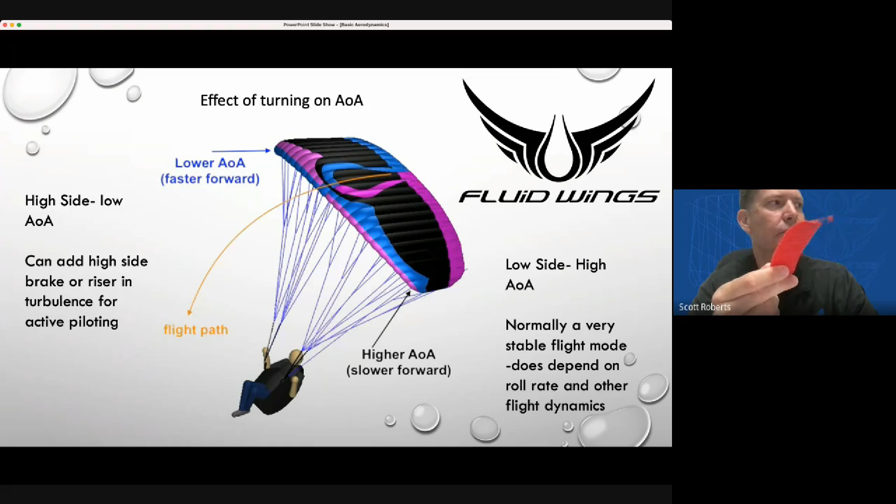So when these wings are turning, you're actually inducing differential angles of attack across the whole wing. I typically will, when I'm flying on a very turbulent day, give brake on the high side as I'm doing a turn. I'll lean in, add a little bit of brake or a little bit of riser on the low side to initiate the turn, and then stabilize it with the high side.

It's important to note that this need for high passive stability in skydiving hinders performance. Speed wing pilots will stop flying at certain times of the day. Pilots will say, hey, look, the conditions are no good, or there's rotor there, don't fly there. They're much more cautious about when, where, and how they choose to fly. At least the ones that have gotten the proper training are.

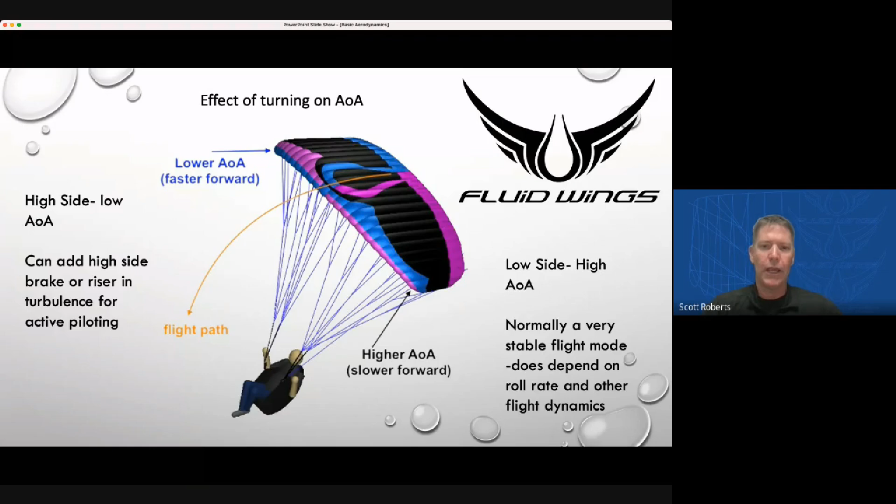So I don't want to go much further than this right now, because we're starting to get into some of the dynamics, and that's a whole other scenario. I find that if we go too far, we won't get as much sinking in and digestion of this material. So I'm going to go ahead and wrap up with that, and say to be continued on some other stuff, and then start fielding some questions.